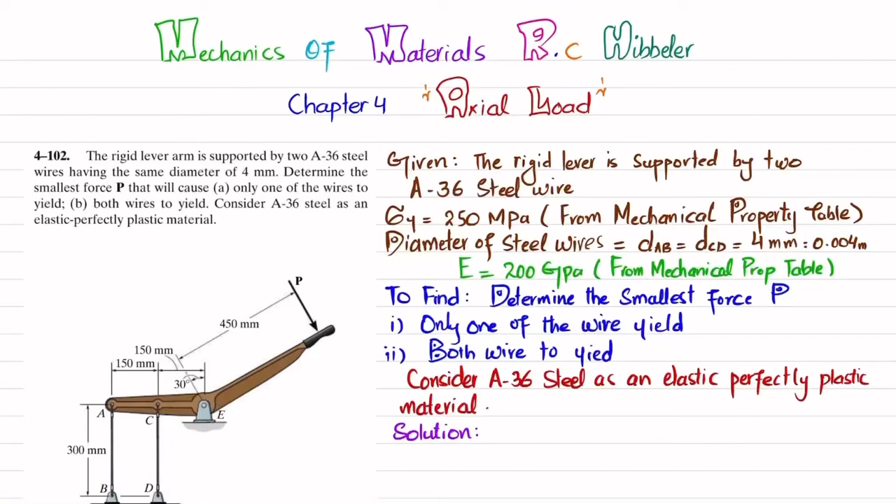The statement is: the rigid lever arm is supported by two A36 steel wires having the same diameter of 4 millimeter. Determine the smallest force P that will cause only one wire to yield, and in part B, both wires to yield. Consider A36 steel as an elastic, perfectly plastic material.

So you can see this is a handle where load P is applied, and there is wire AB and CD. At point E there is a pin support. So you have to find this force P which will cause one of the wires to yield, and in part B, both wires to yield first.

The material is A36, so I've written the given data. The rigid lever is supported by A36 steel wires, and the yield stress of these wires is 250 megapascal, taken from the mechanical property table, and E is also taken as 200 gigapascal. Diameter of both wires are the same, which is 4 millimeter or 0.004 meter.

So you have to find P for one wire to yield and both wires to yield. Let's start with the solution. Due to this load, there will be elongation in wire AB and CD. As a result, if you remove this wire AB, it exerts a downward force on this handle, so there will be a reaction force FAB on the handle.

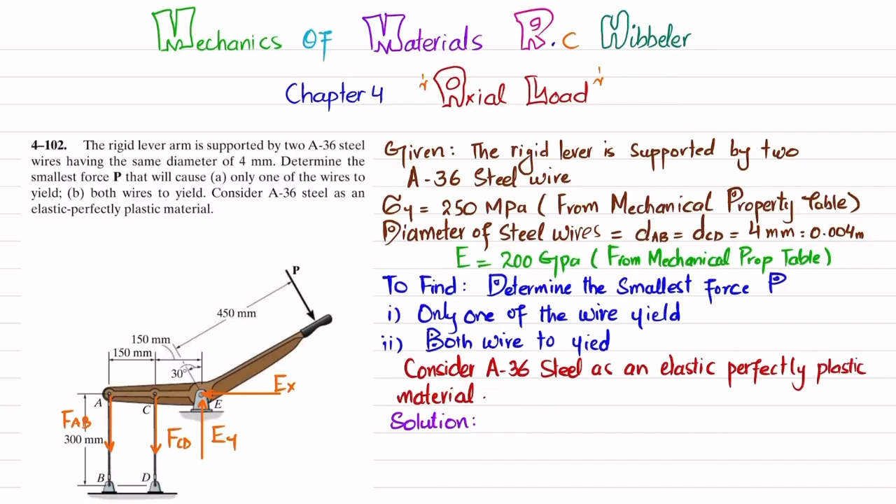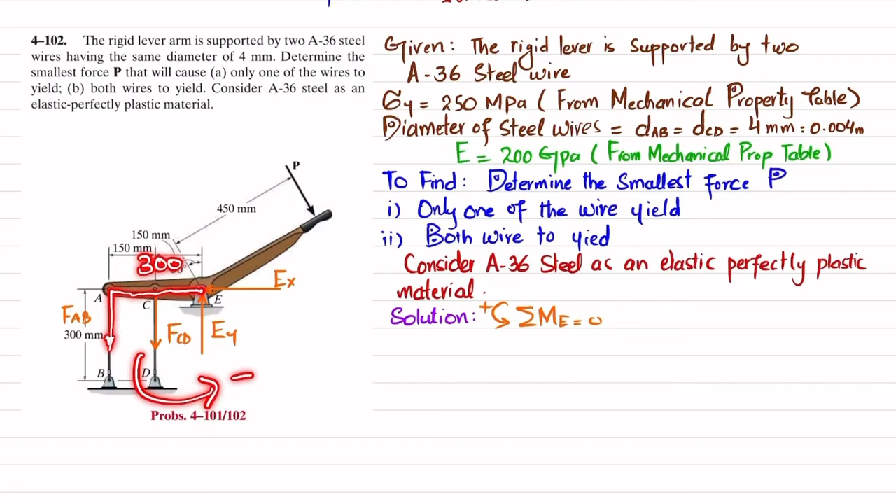So we will find FAB and FCD by using the equation of equilibrium: sum of all moments about point E equals 0, taking counterclockwise moment as positive. About point E, the first moment is due to this force, with perpendicular distance 300. This is producing counterclockwise, so it will be positive.

I will write FAB times 300. The second moment is due to FCD, with perpendicular distance 150, also producing counterclockwise, so plus FCD times 150. The last force producing moment is P, with perpendicular distance 450, producing clockwise moment, so it will be negative: minus P times 450 equals 0.

These two forces are passing through point E, so they are not producing any moment, that's why I haven't taken them. If you divide this equation by 150 on both sides to simplify it, we get 2 times FAB plus FCD equals 3P. Let this be equation number 1.

Now due to this load, there will be elongation in wire AB and CD. As a result, point A will move toward this direction, and point E is fixed, so it will look like this. So point A dash is the new position of A, and C dash is the new position of C. The distance between A and A dash is the change in length of AB, and the distance between C and C dash is the change in length of CD. You can see we get a triangle.

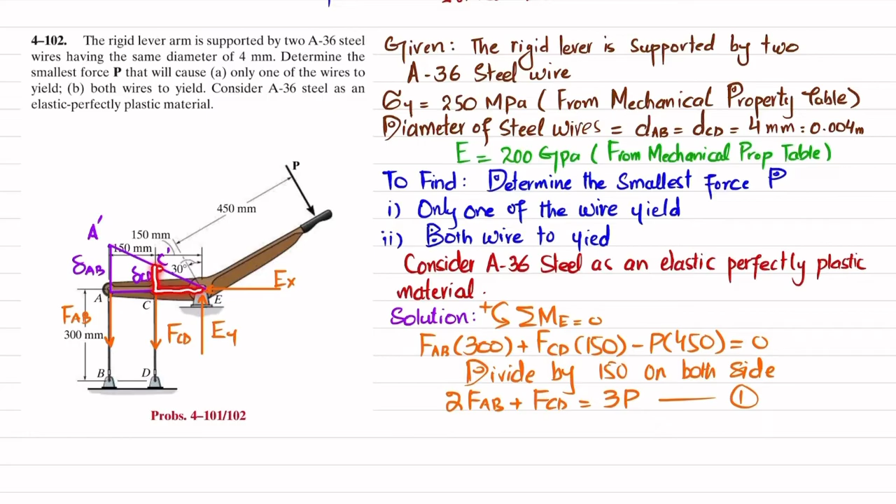Here we have two right angle triangles, one is this one and the second triangle is this one. These are similar triangles, so we will apply elastic analysis in order to find the relationship between these two changes in length.

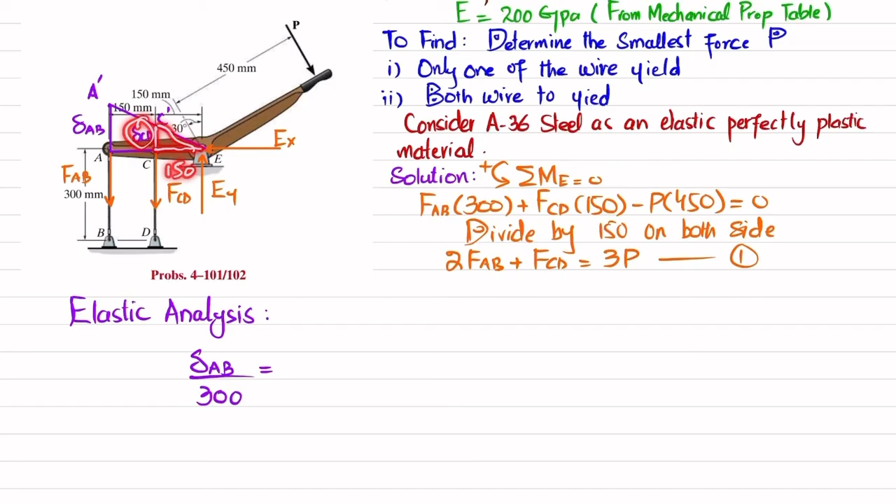By using similar triangles, if I take the side delta AB divided by this length, which is 300, for the larger triangle, it will be equal to, for the smaller triangle, delta CD divided by this length, which is 150.

So from here I will get change in length of AB is equal to 300 divided by 150 into change of length of CD. So again it will give us change in length of AB is equal to 2 times change in length of CD. This is your another equation.

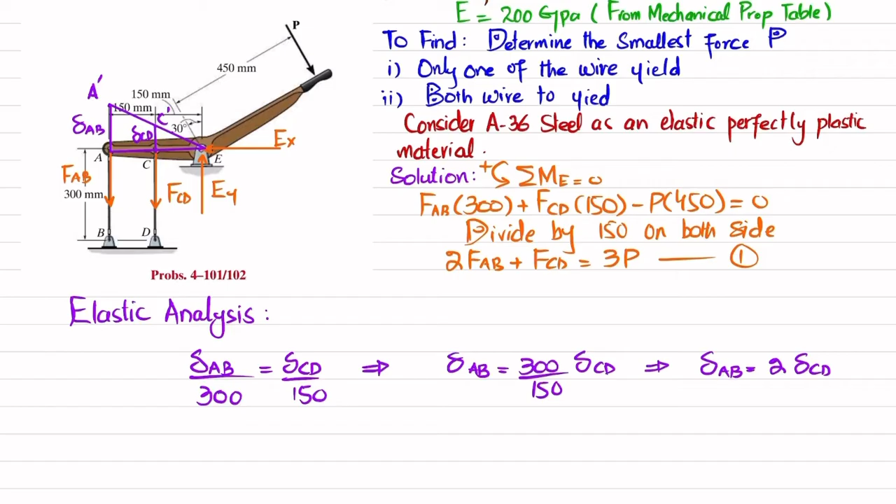Now if I further simplify it, change in length of AB is equal to 2 times change in length of CD. So change in length of AB will be equal to FAB into length of AB divided by area of AB into E is equal to 2 multiplied by FCD into LCD divided by ACD into E.

Since both diameters are same, area of AB is equal to area of CD, which will be equal to A, and length are also same. LAB is equal to length of CD is equal to L, which is equal to 300. So this will cancel with this, E and E will cancel because material is same and areas are same.

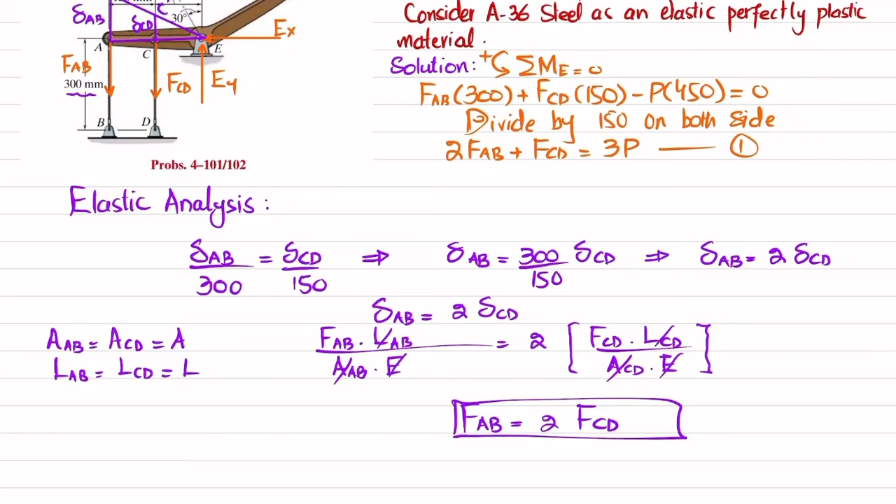So we will get FAB is equal to 2 times FCD. And this is your equation number 2.

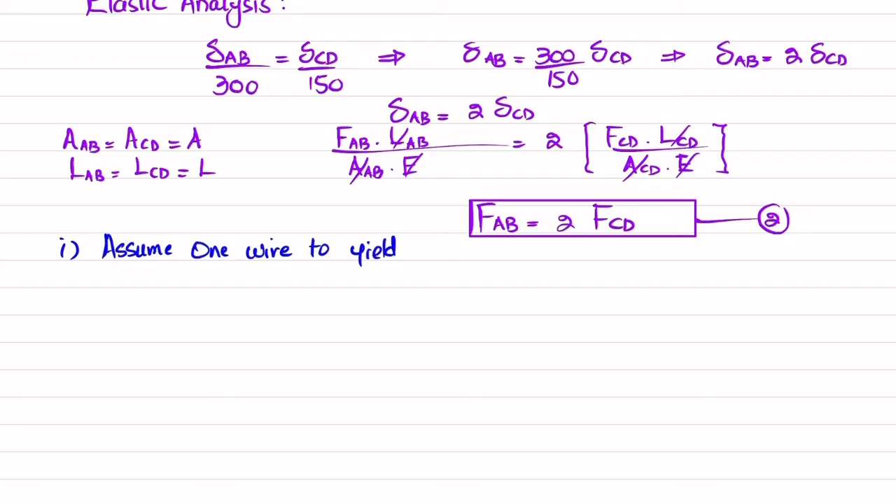Now what we will do is that our first part is that assume one wire to yield. So we will assume that wire AB will yield, because in the previous problem we have seen that wire AB yields.

So this force in AB will be equal to yield stress multiplied by area of AB. Yield stress is 250 megapascal, so 250 into 10 raised to power 6 multiplied by area pi by 4, diameter is 0.004 square. So from here when you calculate it, you will get force in AB will be equal to 3141.59 Newton. So this is the value of force in wire AB.

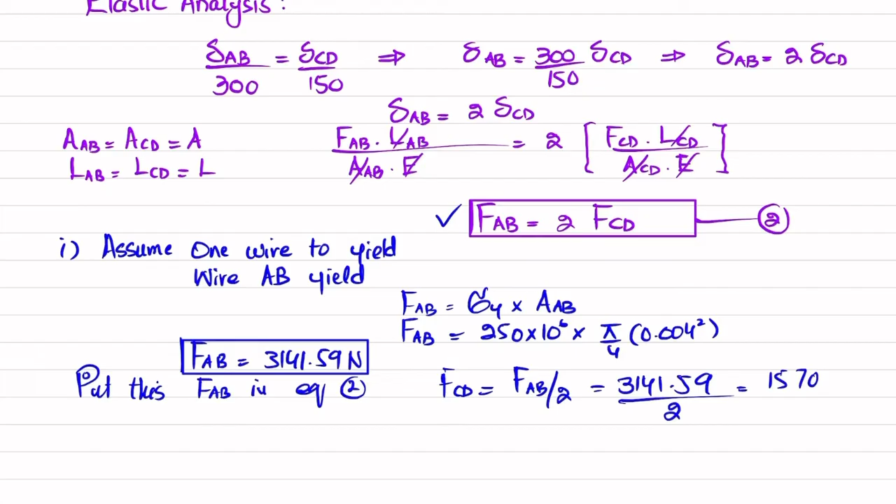So put this FAB in equation number 2, which is this one. So FCD will be equal to FAB divided by 2. So 3141.59 divided by 2 will give you 1570.80 Newton. So I will get FCD is equal to 1570.80 Newton. Now you have the value of FAB and FCD.

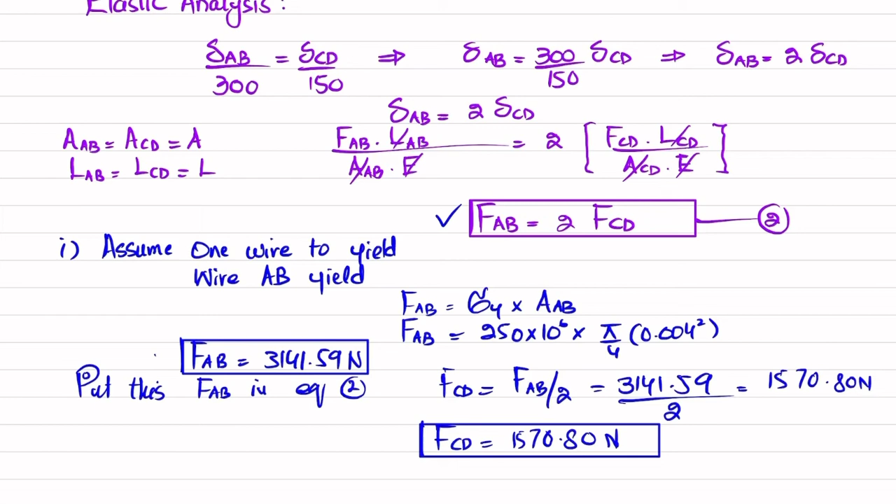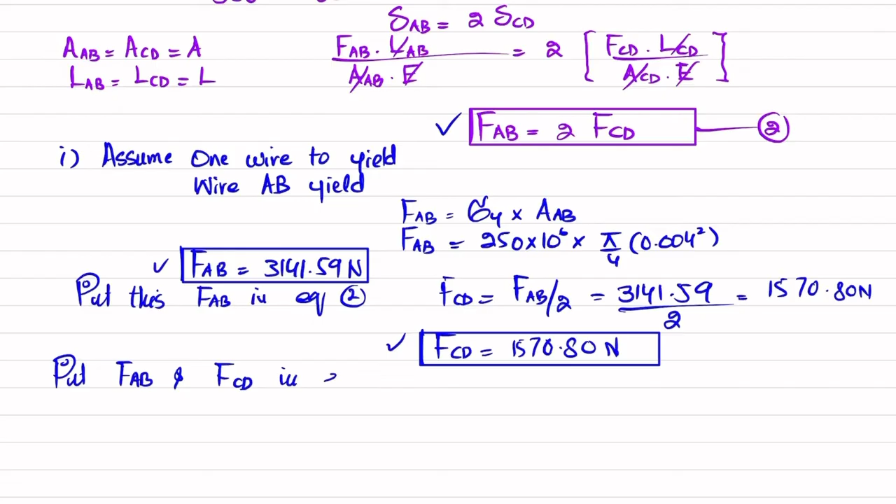So what we will do is put FAB and FCD in equation number 1, which is this one. So when you put it, 2 times FAB, which is 3141.59, plus FCD, which is 1570.80, is equal to 3P. And when you solve this you will get P will be equal to 2618 Newton, or you can say P will be in terms of kilonewton, it will be 2.62 kilonewton, which is the answer of our first part.

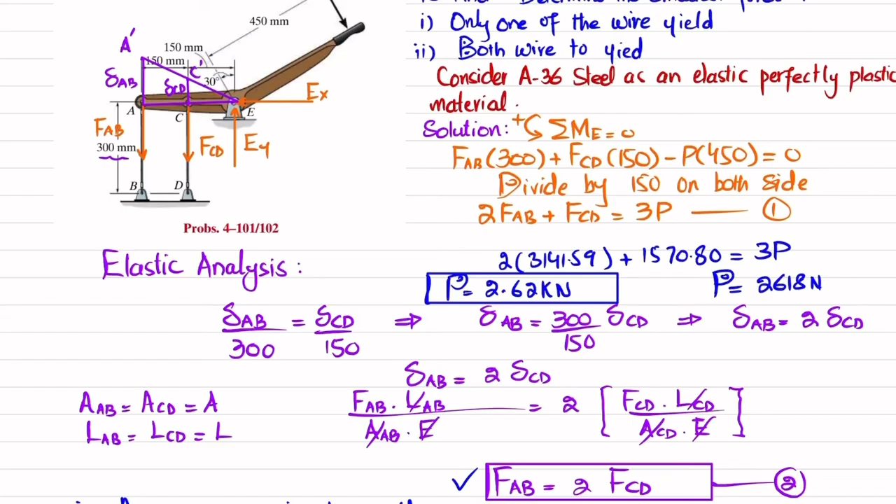Now we will move toward second part, that both wires yield. So again I will move toward the next page. So as this will fail, we'll move toward plastic analysis there.

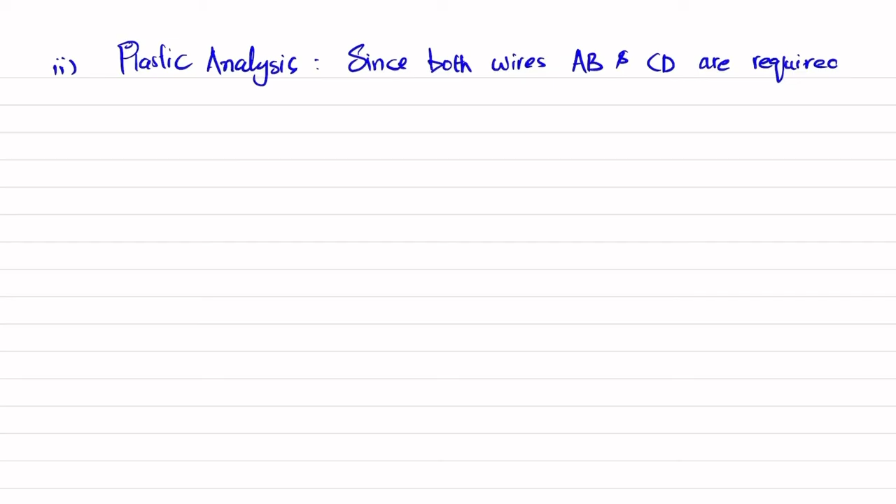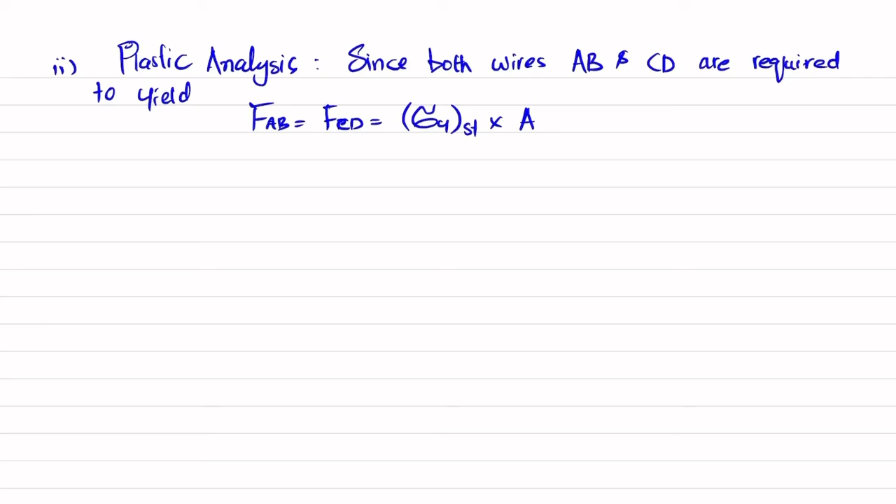And we will write, since both wires AB and CD are required to yield, therefore force in AB is equal to force in CD, and that will be equal to yield stress of steel multiplied by the area. So 250 is the value of yield stress multiplied by the area, which is pi by 4 d square, and d is 0.004 square. So when you solve this, you will get the value of forces in both wires will be 3141.59 Newton. This will be equal to FAB and equal to FCD.

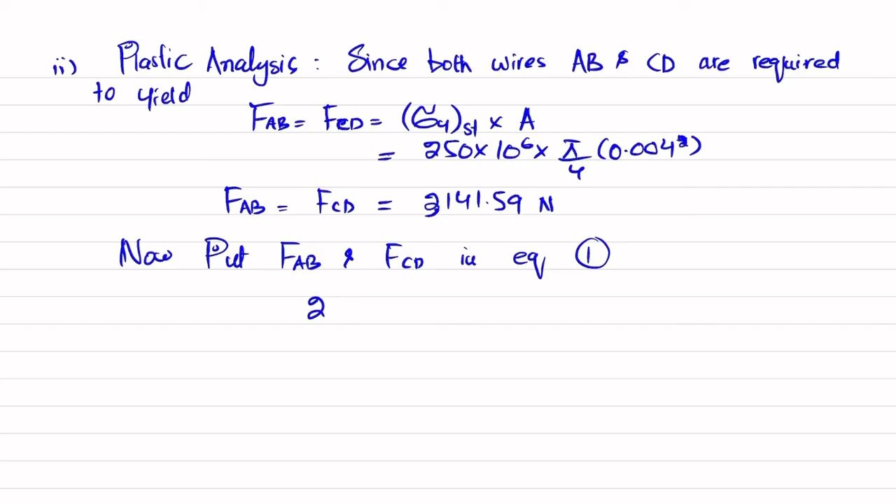Now put FAB and FCD in equation number 1, which is again this equation: 2 times FAB plus FCD is equal to 3 times P.

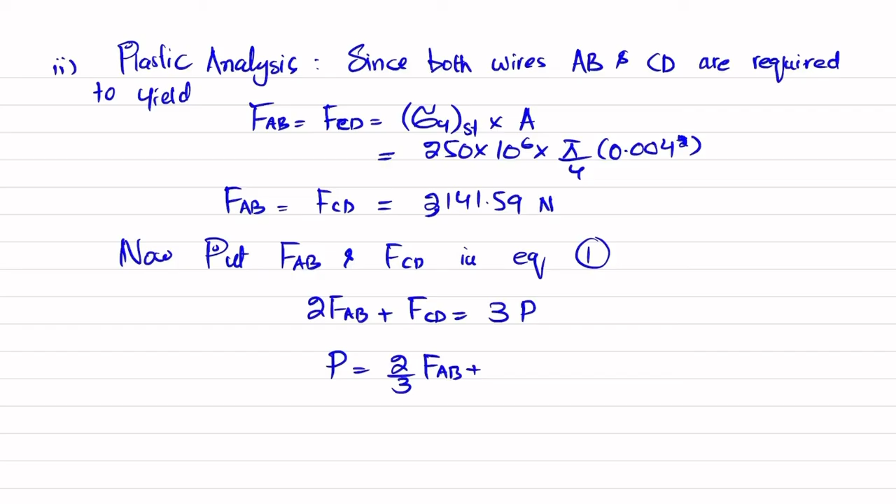So P will be equal to 2 by 3 times FAB plus 1 by 3 times FCD. So put the value: 2 by 3 times 3141.59 plus 1 by 3 times 3141.59. And when you solve this, you will get P will be equal to 3141.59 Newton, or in kilonewton it will be 3.14 kilonewton, which is the answer of our second part.

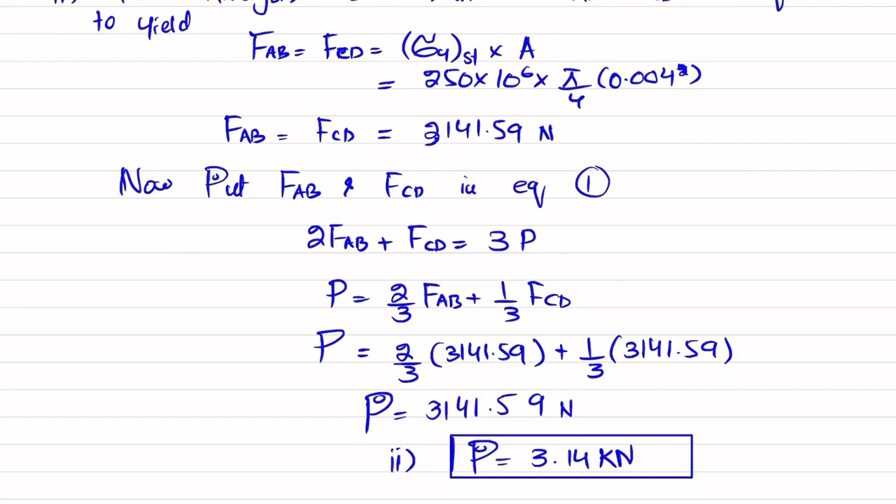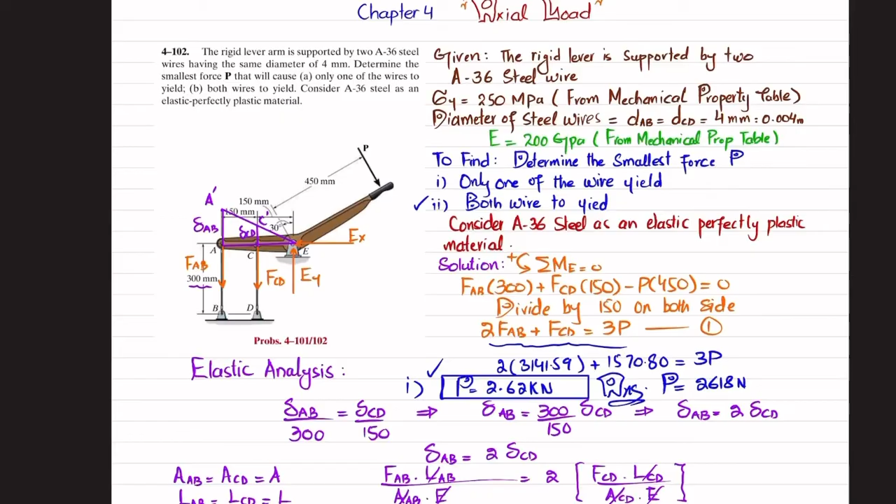For both wires to yield, P should be equal to 3.14, while in the first part P should be equal to 2.62 kilonewton for one wire to yield. And that was all about this problem 4-102.